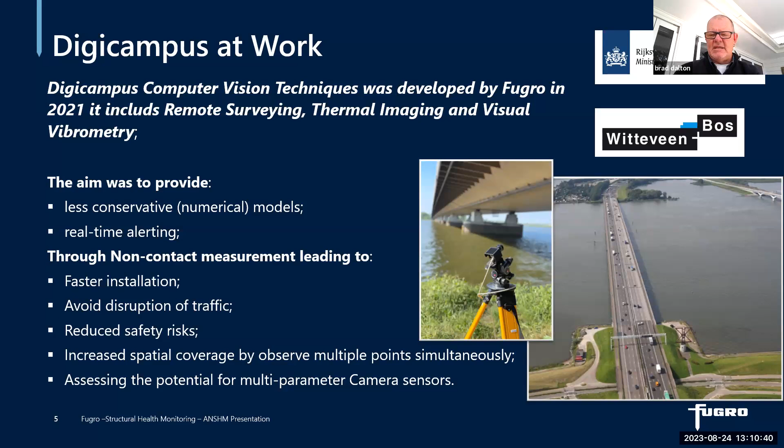So we started with this idea that we would measure vibration on that bridge. That bridge is in Holland. As you can see, it's a pretty major one, it takes a lot of traffic, so obviously you can't shut things down too much. What we were asked to do is they had some cracking issues, and they were trying to identify where and when they occur. So we started off by taking some video using a number of different techniques, and we also had some algorithms we've written that allow us to take long periods of measurement and turn it into the video you see. We started with vibration, but we also measured a whole bunch of other different things.

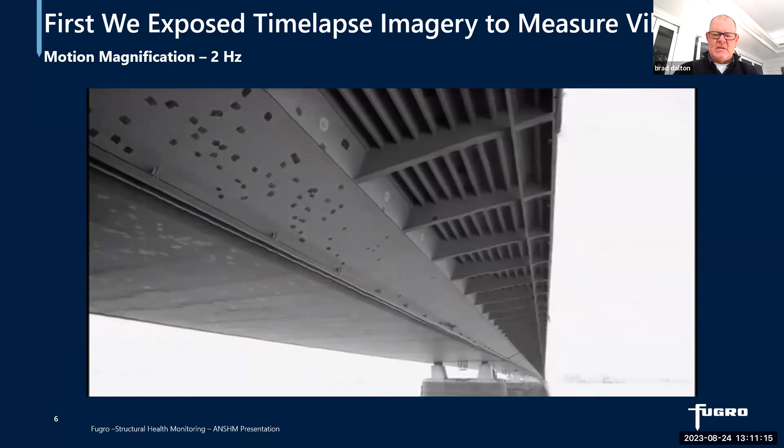So after that, we then looked at the idea, on this same bridge, of measuring it instead from underneath rather than from the side, which presented itself as a better way to measure what was going on, to figure out where the waves produced as traffic runs over the bridge were propagating and concentrating. And you can see pretty clearly on that image where that was occurring.

To do that, we used a number of different techniques, but we also, in the process of this, developed some in-house algorithms to be able to analyze the data very accurately and spatially locate the things that needed to be identified, so that if there was a need to get onto the structure itself and put things in place, we knew actually where to put them rather than just trying to cover the entire structure.

So from that, we then went to the idea of let's have a look at it using thermal imagery. The whole idea was to see if we could identify various different things that occur, because if you've got a crack or a warp and you've got movement going over the bridge, it creates a little bit of heat, and you can measure that if you have a camera with enough resolution in terms of the thermal range.

So from that, we managed to come up with a graph that showed over time what was going on with the structure, how much it was heating, where things were happening. But the thing that was very obvious is that over time, things heat up and contract, heat up and contract, and you can be very confused or uncertain as to whether the result is actually showing you something real, simply because of the time between one measurement and the next. The sun might come up, get to 30 degrees, go back down. At night you're down to 9 degrees, and everything moves, and it would appear that there's movement, but in fact there's not.

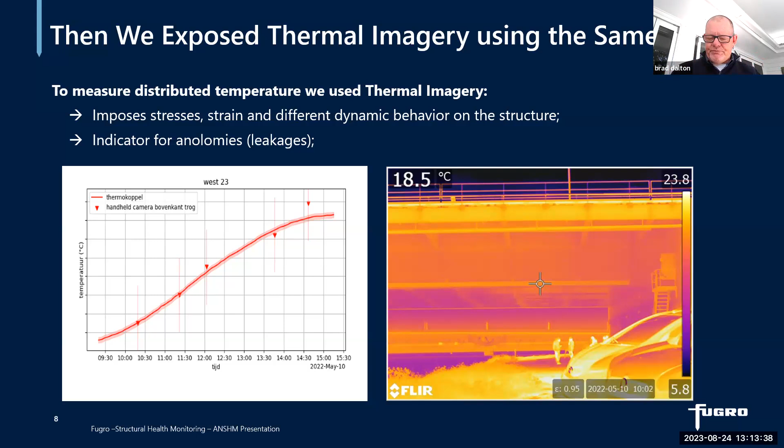So from that, we then went to a point where we could start to identify where cracks occur. Going back to this diagram, what we then did was focus a camera on where those waves are occurring most obviously, in order to see if there was a crack. For this, we used the Imetrum product, and I'm going to play a video here which shows you as traffic was passing over the top of the bridge and creating movement and vibration, you could see a crack start to appear in the analysis of the data.

You can see very clearly that as each car goes over the top, the crack opens up a little bit and closes a little bit, opens up and closes. So from a spatial perspective, we were able to identify the X, Y, Z of where that was occurring. From the analysis, we were able to give them a magnitude and understanding of what was going on and when. And from a remediation perspective, they were able to go and treat that and deal with it accordingly based on the data.

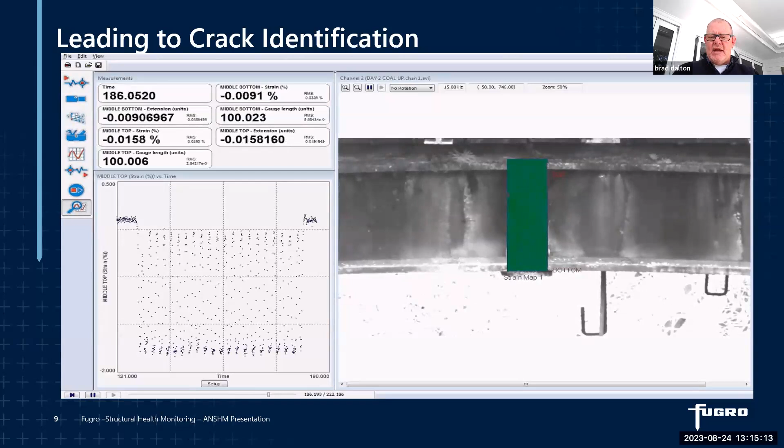Over time, we managed to identify something like 50 or 60 cracks in place along the bridge that allowed that asset to extend its life by treatment. It was just the process of those three sets of different readings that allowed us to narrow down very clearly on what it is that we needed to address, or more importantly, what the structural engineers needed to address.

Having said that, we then went back to an original idea of measuring the vibration and comparing the set of movement we got out of one set of instruments to a laser device, which you're all fairly familiar with, just to see whether or not the camera was giving us a similar result to what the laser would give us. Obviously the laser is very pointed, whereas the camera is pretty broad, so we had to move things around a little bit to get a measurement. That meant we had to align everything up time-wise, or temporally together, in order to get a comparison.

But it showed pretty clearly in the end that, over time, we were measuring fairly accurately using the standard laser method against the vibration camera.

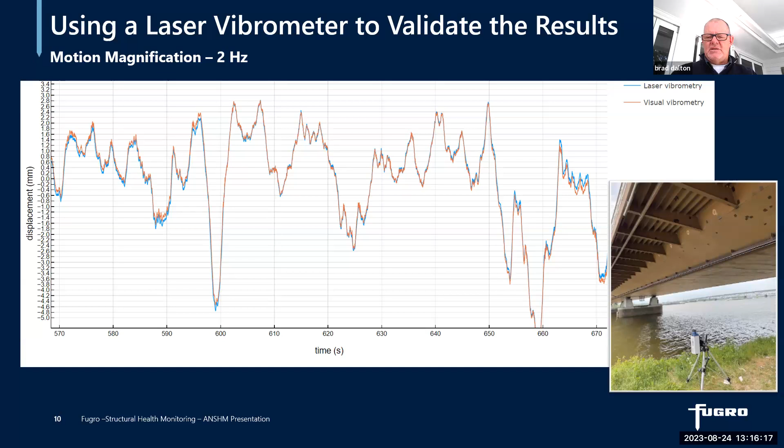This is what it looks like. It comes with its own box and housing. The whole idea is that you set it up and leave it in place for a period of time - not long. It's not one of the systems you can set up and walk away from, well, if you want it to still be there at the end of the day. It's a little bit expensive to have put in the back of a car and driven off at speed. So the whole idea is you set this device up, and it's connected to its own box in the middle of the screen, which has a computer attached to it that does recording but also has the analysis capability. That's actually a screen in the middle of the lid, so you can bring up the data, check it on site, make sure it's all valid, that you've got what you needed, and then take it back to the office and process it.

Having said that, you can actually process it on site as well. But when you combine it with some of the other instrumentation we use and put it into our Digicampus format, you're able to get a fairly clear idea pretty quickly of what's going on with the structure without having to climb on it, touch it, or otherwise. That's the whole point of this measurement system, to try and get away from hands-on structure or people on structure and the safety issues that go with it.

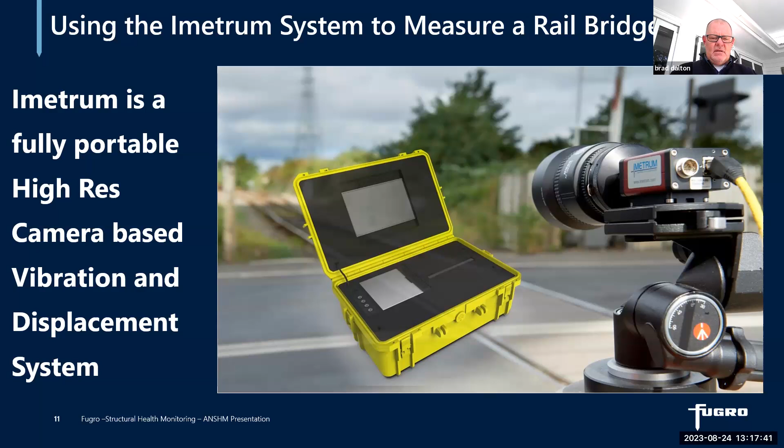But the beauty of it is that you can capture the entire bridge all at the same time, and get very high accuracy out of it. You don't have to measure one piece and then another if the structure is small enough. Clearly if the bridge is 2 kilometres long it's a different story, but if it's relatively short, like this one, about 50 or 60 metres long, we were able to sit to the side and then go to the other side of the bridge and measure the same thing in a different direction. There are points of commonality from both sides, so we can tie them together. We can get out a total station and, if necessary, shoot reflectorless onto some of the structure to put X, Y, Z in real world or absolute coordinates around it, and do some pretty good analysis.

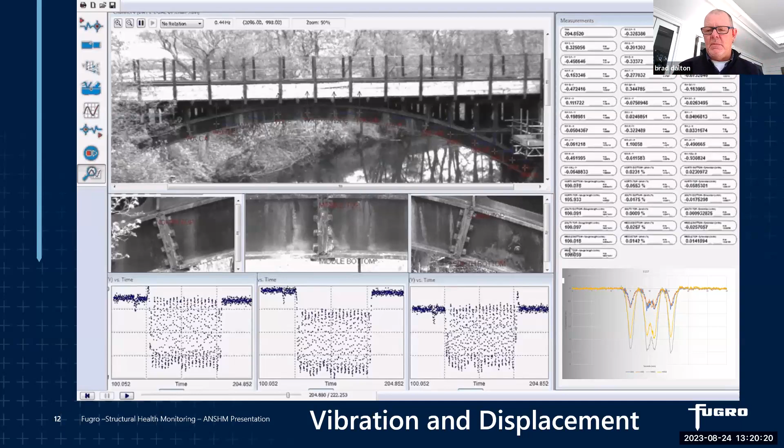From that, we identified a part of the structure that needed to be measured. So this is as the train goes over, and you can see that's having a fairly severe and obvious effect on what's going on. You can see the relative displacement occurring over time as that happens, and then, of course, as it gets to the end, it settles.

So we were able to, in that same day and the following day, just focus on the various elements they wanted more precise or higher resolution information on, simply because this rail line happened to have a train going over it every 5 or 10 minutes or so. So it wasn't hard to move it around from one location to another to see what was going on.

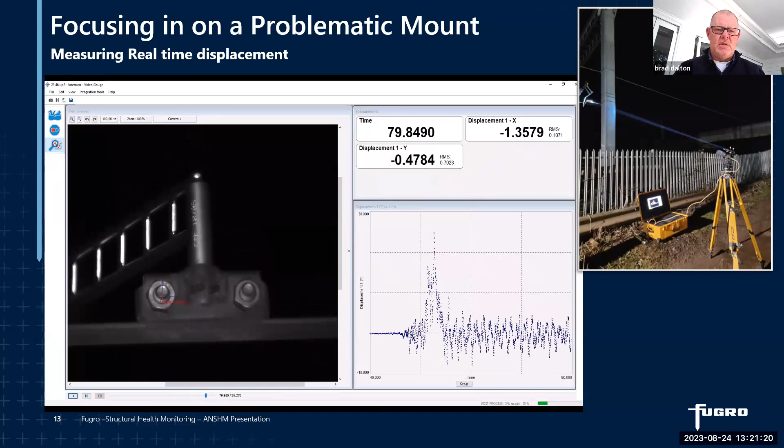Following that, Fugro went down the path of working out a cost-effective way of doing measurements by putting an optical device in place that gave surveying type measurements rather than this straight displacement. The difference there, of course, is absolute versus relative. As much as it doesn't look like it, this thing is actually a total station, based on the idea of a camera. It needs prisms in order to measure to, which is probably not ideal compared to what we've just been discussing. But you place those after you understand what you're going to do, and then you can put this thing in place permanently to monitor what's going on.

The beauty of it is that it sees all of the prisms simultaneously. As opposed to a total station, which goes measurement, measurement, measurement in an array, and you have a temporal shift between measuring prism 1 and prism 15, for example, and over the whole array you might have 15 or 20 minutes of work, this thing can go snapshot and it gets every prism simultaneously. And it's cost effective - in comparison to a total station, it's about 1/5 of the price.

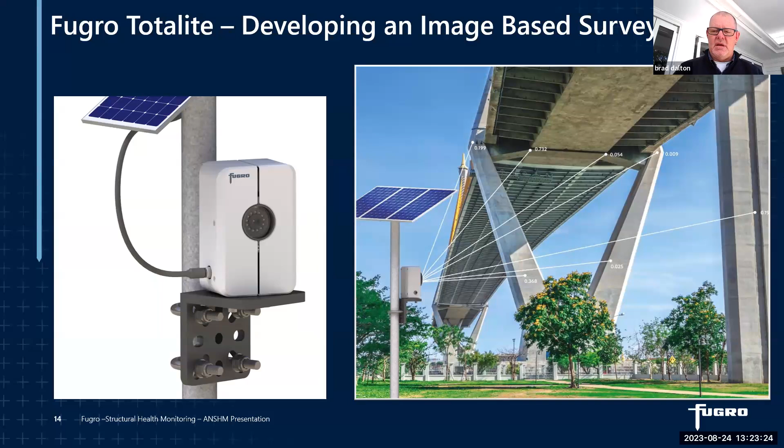It's able to see in infrared as well as normal light. And obviously, as you can see, it's powered by solar array, but it doesn't have to be - you can run power to it quite comfortably. It works on the cloud, but it doesn't have to be - we can put a computer, an edge computing device beside it.

So currently, we've done all the things that I've just been speaking about with the Imetrum and everything else to work out that this particular bridge has some issues. So they've gone and put about 7 or 8 prisms on this bridge to understand what it's doing. The question here is, does the bridge get replaced, or do they elongate its life?

So we put a Totalite in place right beside the bridge at right angles to it on that wooden pier that happened to exist at the same time. And for a little while, we ran a total station beside it just to see whether we're getting the same results, which we were. And we've been measuring that bridge for quite some time.

The whole idea is that it measures from one end of the bridge to the other in one snapshot, and it does that every 1.5 to 3 minutes, depending on how often you want to set it to measure. And it does that throughout the day or night - it makes no difference. Those results are fed back to the cloud and into our Digicampus software, which the client can access.

It's a bit of a game changer as far as the way that measurement systems work, like surveying type measurement systems, because generally speaking, you need to have a fairly expensive piece of equipment, being a total station that's got horizontal, vertical circle, laser involved, computer on board, etc. This device is just pure optics.

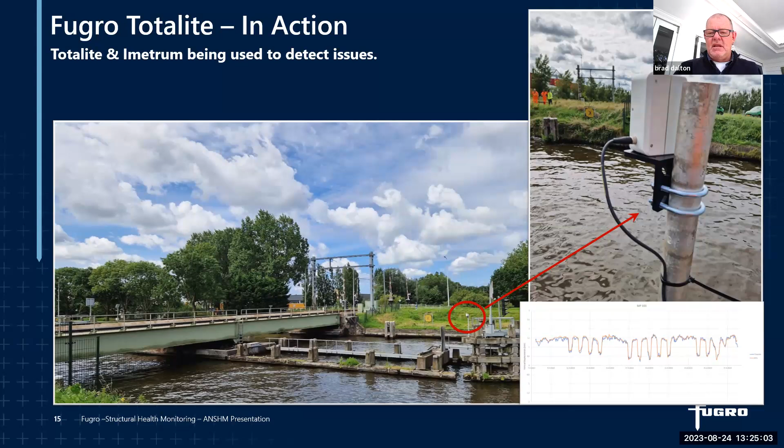The way that it operates is that it sends out a flash of light and it's looking for a return off the prisms. So the flash of light that's coming back off the prisms is sufficient for the computer algorithm to narrow down on the individual prisms and then measure them all simultaneously.

You can set multiple up at the same time. The prisms are relatively lightweight, pretty easy to install. They can be magnetized. You can connect this through the gateway back to the cloud, or you can put an edge computing device beside it.

It's pretty hard to knock off. As I say, it's robust. We have mechanisms in place in it to identify when things are obscured. There's a whole bunch of checking that goes on in the background to see whether or not a bird's decided to have breakfast right beside it, or if it's got some spider webs on it and that sort of stuff. We can identify that reasonably quickly and easily.

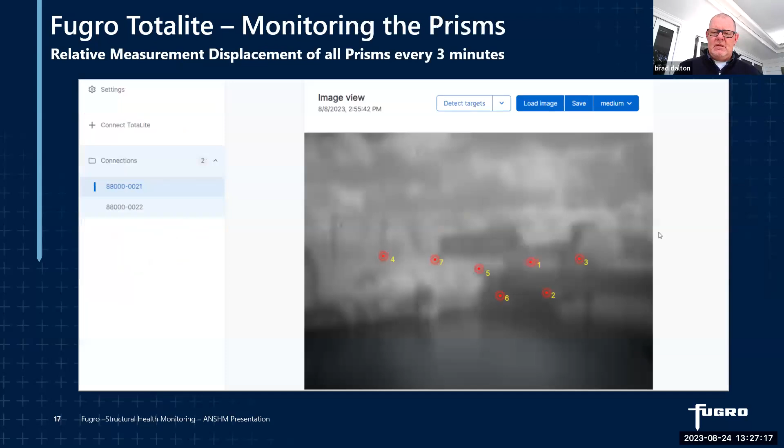The applications for what we see the Digicampus product being is everything from construction through to waterways, railway, and mines and so forth. As you can see on the screen, we've got a lot of different applications for the things that we do. It's not just Totalite there - it's a whole bunch of measurement devices. After all, we are spatial scientists.

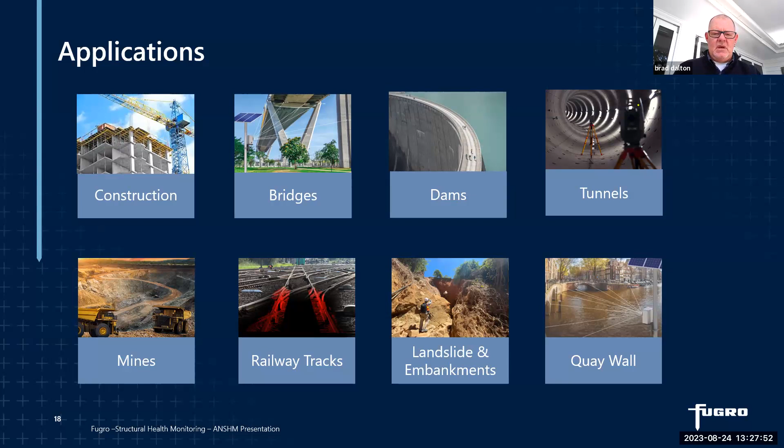We've got offices all over the world, so we get to play in a lot of different spaces that in Australia you wouldn't find easily. And then the last thing is, what do we learn out of this? The things on the screen explain in detail what we found and where we've decided to focus our efforts and try to improve on our systems and the way that we look at things.

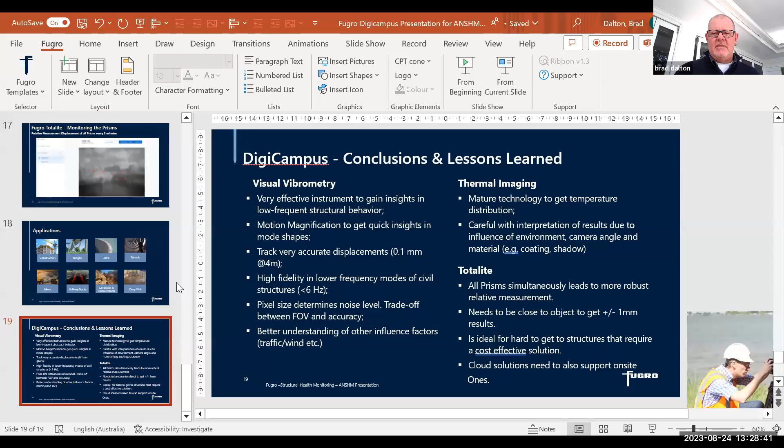Some of the issues we've faced along the way - things like coating and shadow is a pretty big one, it happens in lots of different places. And obviously the ability to measure high fidelity, low frequency, as well as really high frequency, depending on the situation. So with that, I'm pretty much done, and I'm happy to take questions. Thank you for having a listen.

Thank you very much, Brad. That's really interesting. I'm going to hog the stage now, John.

One of the things we've found very difficult with optical base systems is the referencing. The poles get hot and cold, the sun goes up on one side and down on the other, and all of our imagery is constantly moving relative to itself. How do you reference your image systems, and how do you get around that problem?

So as far as referencing is concerned, we would usually go out with a total station and measure to a number of points over periods of the day and try to develop a model around temperature variance and how much things can expand and contract.

You can use a total station with a reflectorless on it, or you can use a prism or stick-ons - little square stick-ons, I'm sure you're aware of them. With those, we're able to measure to things that are off structure, that are nearby, that are in the field of view, and that gives us the ability to, in a way, resect everything else, because you've got these fixed things on the outside as well as the moving things in the middle.

And that becomes really relevant from a spatial perspective if you want to get absolute to relative, or relative to absolute. Those things are really important in terms of planning.

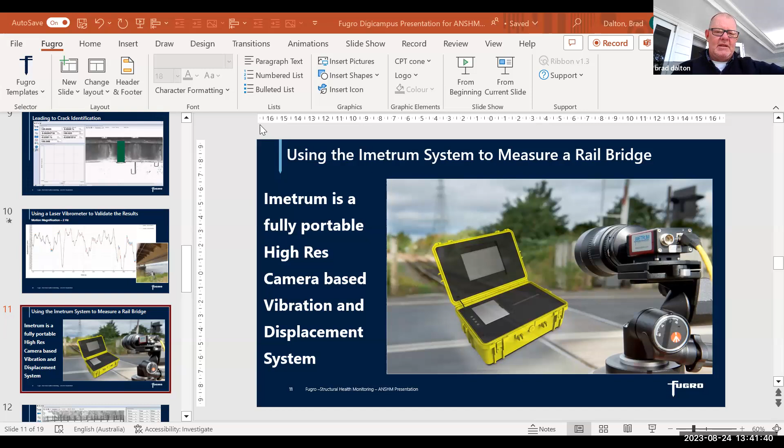Next question: is the measurement of displacement more sensitive for determination of the existing pre-stress force? Any environmental effects to consider? Yeah, plenty. You want to plan it so you don't do it on a rainy day, or when a cyclone's blowing through, or when it's 47 degrees in the shade with high humidity - our general suggestion is don't do that. Try to take measurements at standard temperatures and pressures - anything from 15 to about 30 degrees is just fine. On a really hot day, you want the camera lens under an umbrella, not because you don't want it to get wet - they're robust and waterproof - but because you don't want it to get hot. Heat will cause the metal to move, not the glass.

Now next question I've got is measuring square on from side is best position. Have you verified when you position the camera is not square on?

Yes, we've taken quite a bit of imagery where the camera hasn't been pointed directly at the target. It really doesn't care. If it's looking at the house behind me over in that corner, it's looking at that part of the door, and it uses that as a reference. As far as it's concerned, it's looking straight at it. It just happens to be looking at it from your perspective from the side.